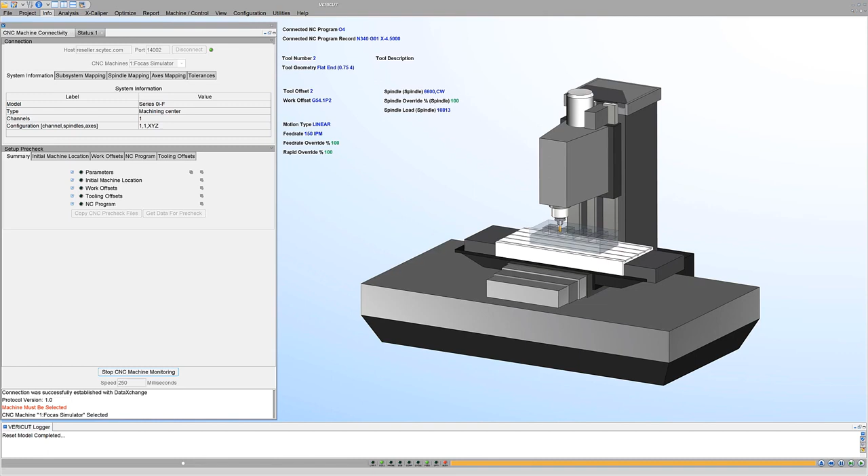CNC Machine Monitoring continually updates the connected Vericut session with the CNC machine's axis positions, active NC program, tool and work offsets, cutting tool in use, and a wealth of information about how the machine is behaving and performing.

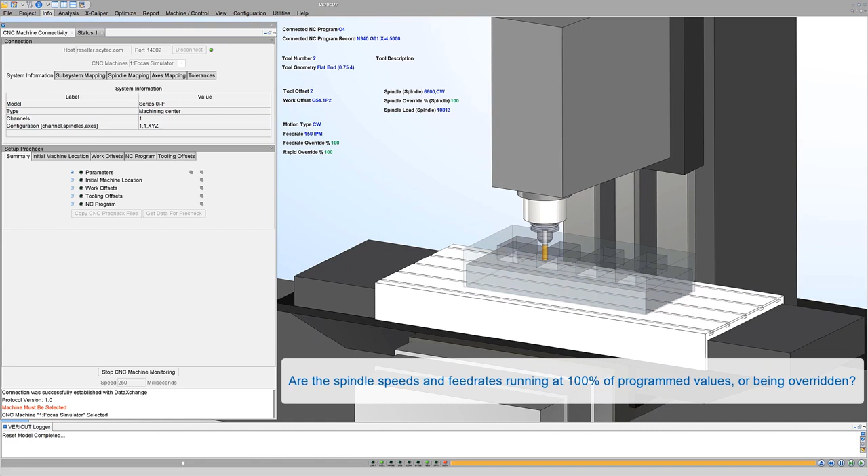CNC Machine Monitoring helps answer questions like: is the machine running or stopped? If stopped, why? Which part, program, or tool is running, and what part of the NC program is being executed? Are the spindle speeds and feed rates running at 100% of programmed values or being overridden? How much longer until my part is finished?

See spindle or feed rate adjustments on the controller immediately displayed in Vericut. Identify overrides or emergency stops as they happen in real time.

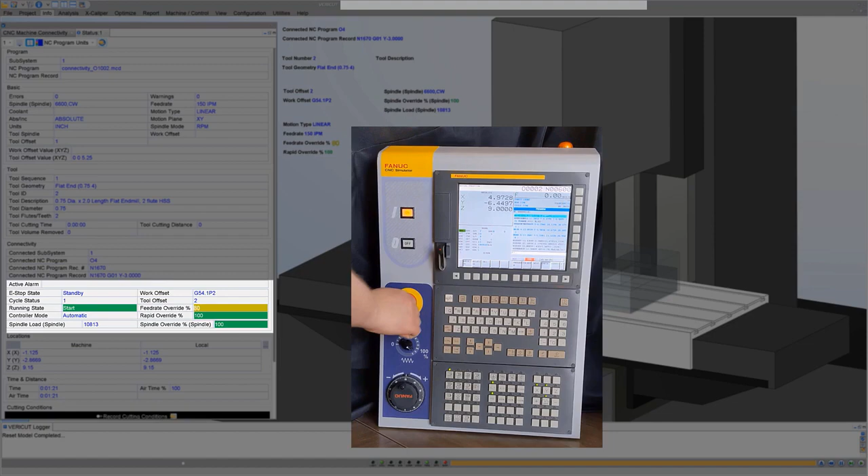CGTech's Vericut works with Scytec's DataXchange software to achieve high-accuracy digital twins of CNC machines on your shop floor.

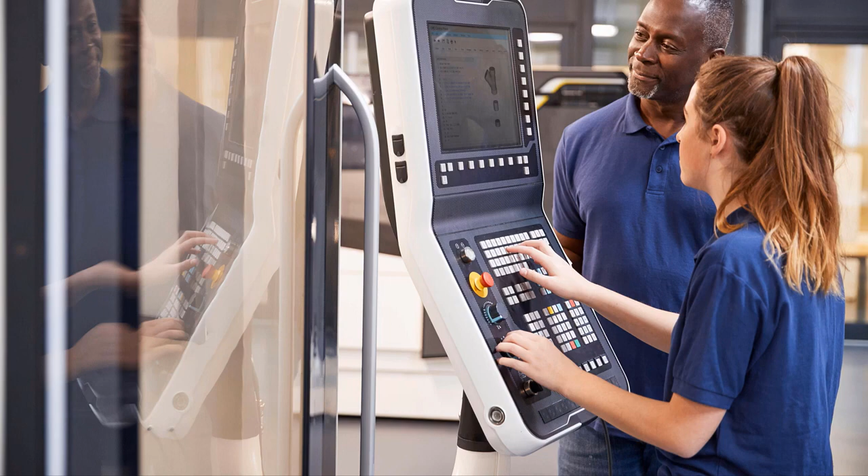As a result of the Scytec-CGTech partnership, Vericut can connect to CNC machines via Scytec's DataXchange Machine Monitoring software. Vericut has expanded on the CNC Machine Connect module to include a standalone CNC Precheck application.

The CNC Precheck application can be used on shop floor computers or Windows tablets next to the CNC machine to compare setup information in the CNC machine to the corresponding settings in your Vericut simulation. By ensuring these settings match as closely as possible, users can avoid unpleasant surprises from occurring in the shop.

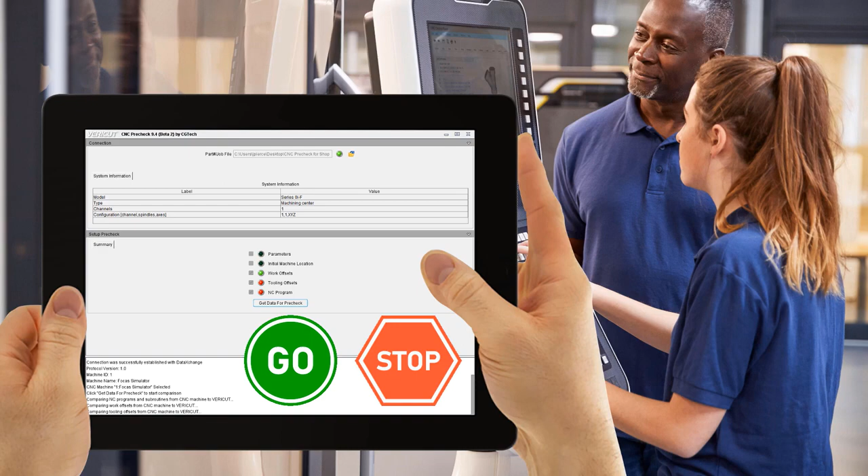Before pressing Cycle Start, use the CNC Precheck app to act as a quick go, no-go gauge to verify the real setup on the machine matches what was simulated in Vericut. For additional information about the Precheck capabilities, see the CNC Machine Connect video.

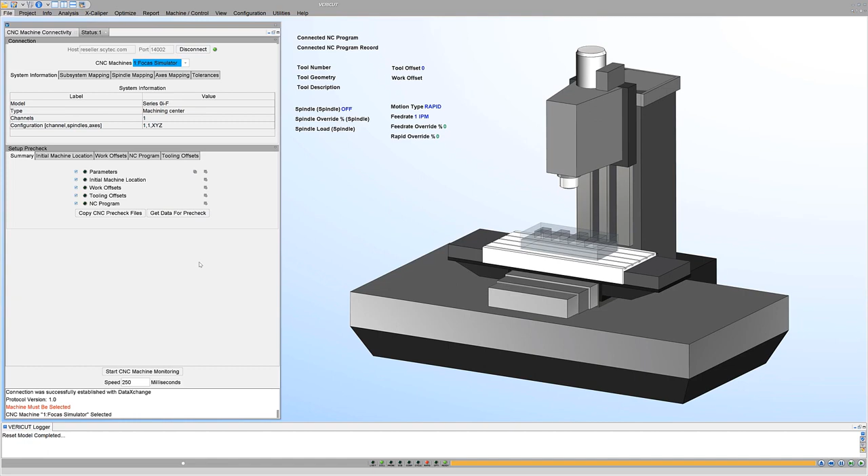As a result of the Scytec-CGTech partnership, Vericut can connect to CNC machines via Scytec's DataXchange software. The CNC Machine Connect module gives users the ability to connect with and utilize the data from CNC machines on the shop floor in your Vericut virtual machine.

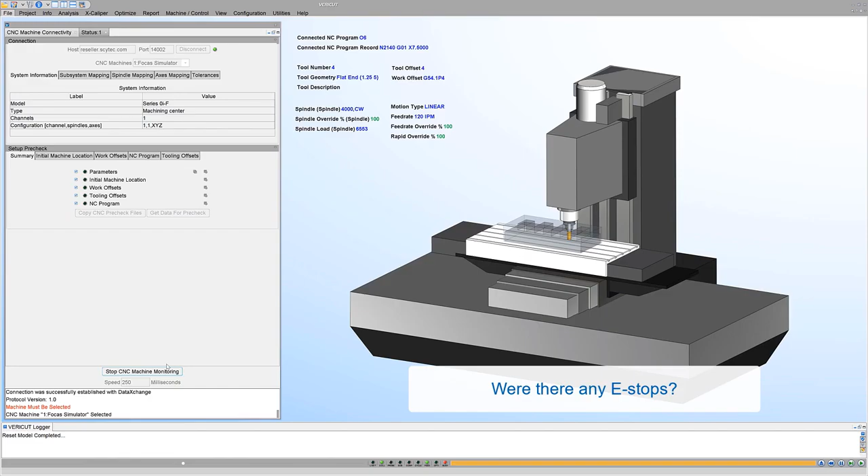Answer questions like: did the shop have the correct NC program and subroutines? Are the cutting tools in the machine set to correct lengths? Did my feed rates and spindle speeds work, or were they modified? Were there any e-stops? Also available is Vericut's standalone CNC Precheck module.

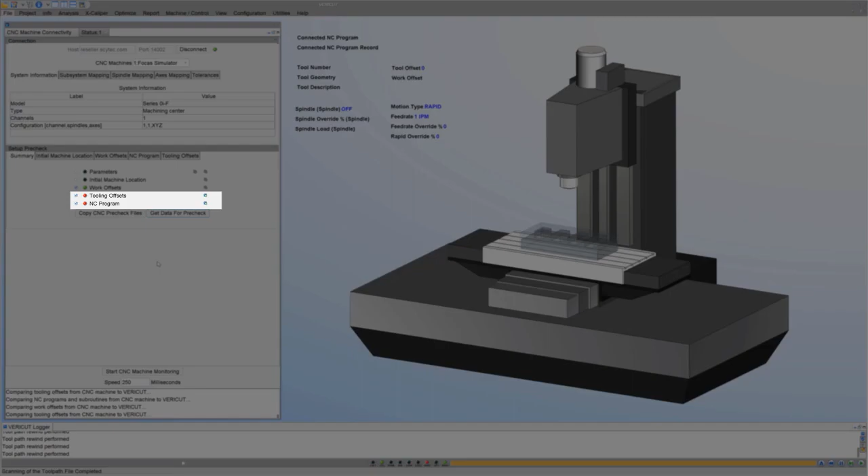This application can be used on shop floor computers or Windows tablets next to the CNC machine to compare important setup information to the corresponding settings in your Vericut simulation. If differences are found using CNC Precheck, the NC programmer can investigate further. Indicator lights clearly highlight when machine data matches Vericut or not.

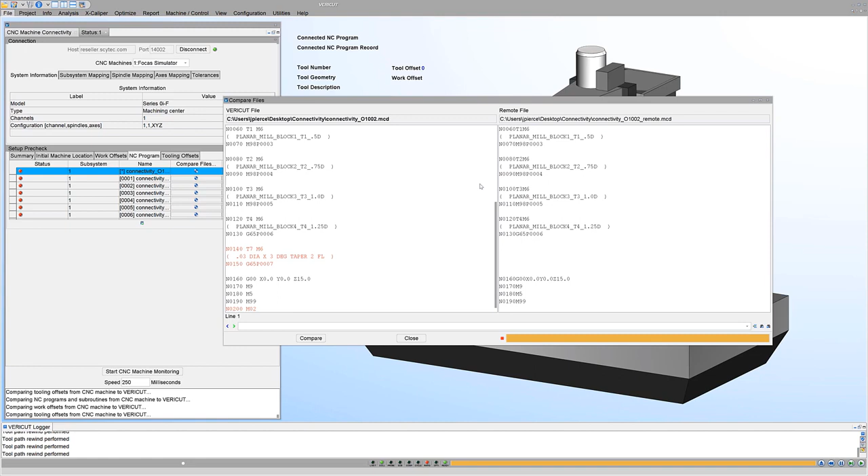Compare the NC program from Vericut to the NC program in the real machine. The comparison shows a revision that is not in the CNC machine. The comparison also shows a missing section of G-code.

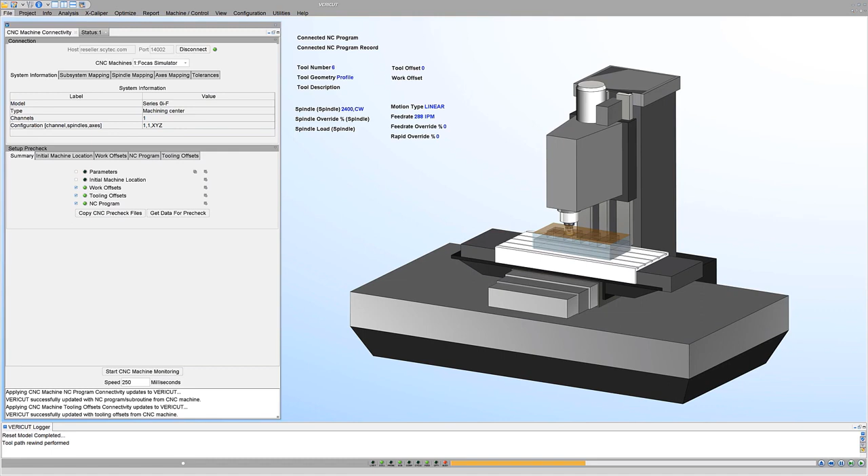Identify tool length differences between Vericut and the tools on the CNC machine. Automatically update the tool lengths in Vericut to match the real machine. The Vericut simulation is run with data from the CNC machine to see if there are any differences. In this case, we see using the real tool lengths from the machine will cause an error.

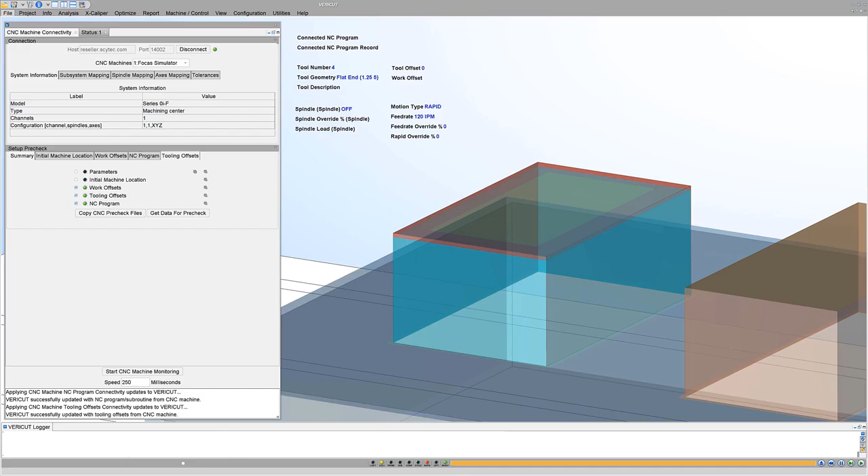CGTech's Vericut works with Scytec's DataXchange software to achieve high-accuracy digital twins of CNC machines on your shop floor.

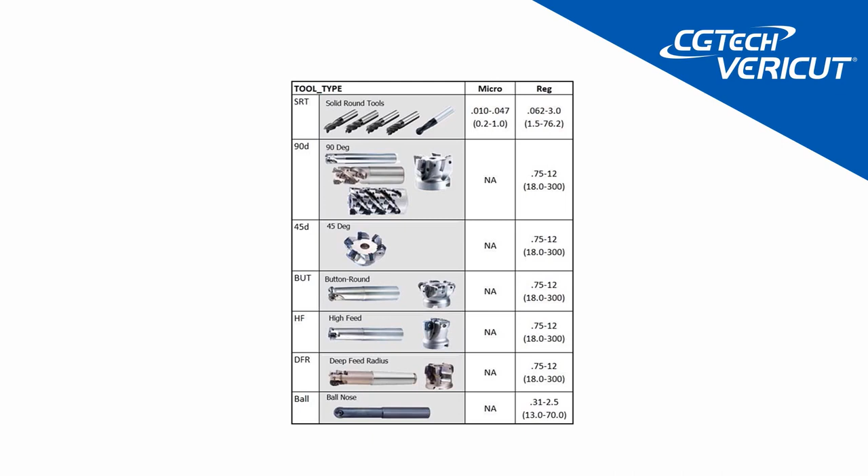In Vericut 9.4, Vericut's tool data containing industry-recommended cutting data such as spindle speeds, feed rates, cutting limits, and more is available to support regular and micro tools that machine a wide range of stock materials.

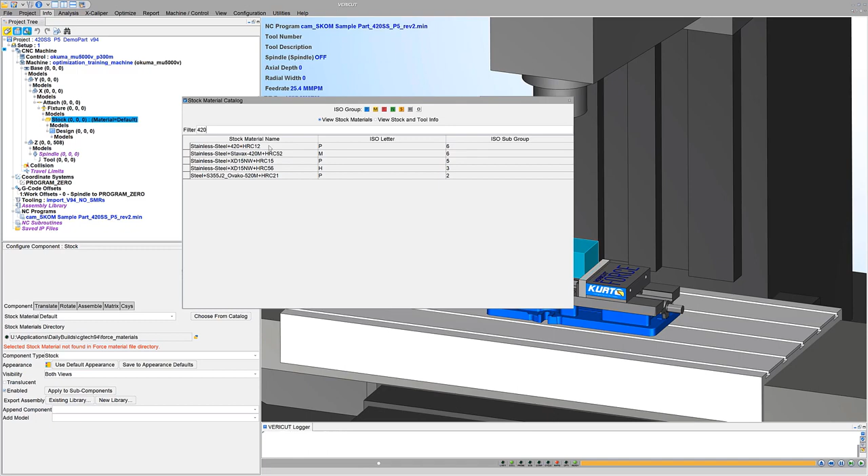Cutting values provided are for the current stock material, so start by selecting the material. In our case, it's 420 stainless steel. For proper feed speed handling, ensure cutters have the correct number of teeth, type of cutter, material, and edge type defined.

With just one click, the Provide Default Tool Data option automatically provides cutting data for all cutters or insert tools capable of using Vericut's stock material records. Let's look at Tool 1, a 25mm solid end mill.

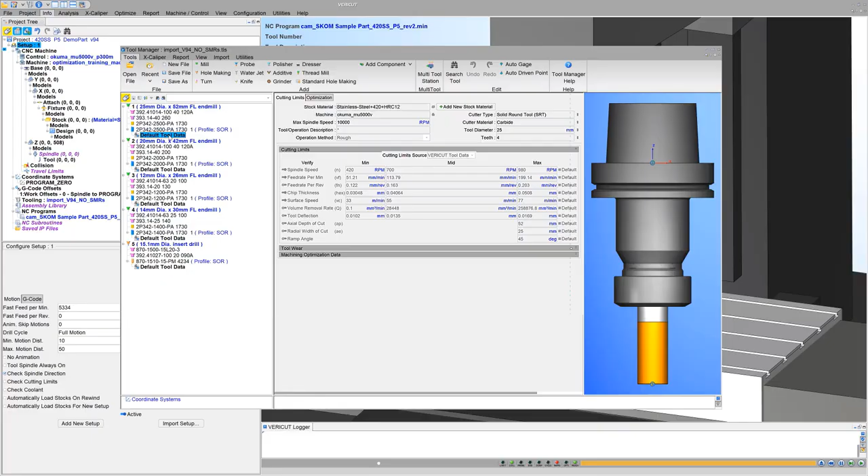Notice the operation method is rough, and cutting limit source indicates these values are from Vericut's tool data. If Vericut tool data isn't available for a cutter stock material combination, then default values are provided. Starting optimization settings are also provided.

Default tool data acts like stock material records used to verify cutting and optimization. However, default data cannot be modified. To customize, for example to choose values for finish operation methods, simply add a stock material record, then modify as desired.

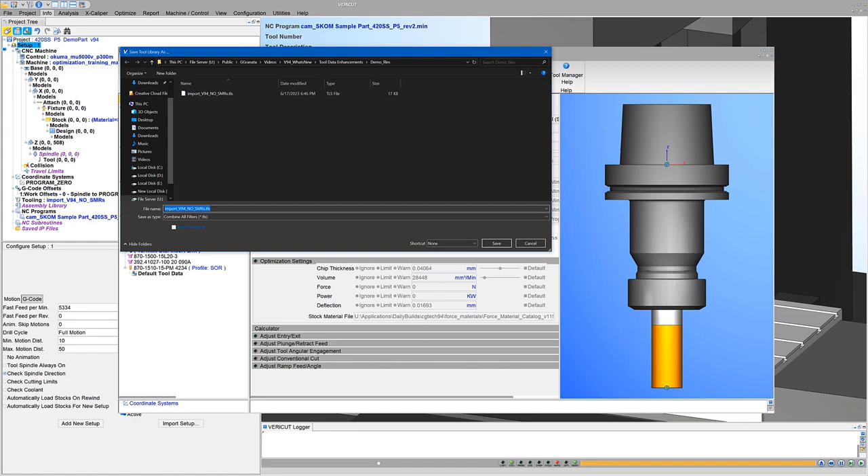But for our case, we'll activate the default data for roughing. With default tool data and Vericut's tool data, you're ready to verify and optimize cutting within recommended range limits. For more information about Vericut tool data and default tool data, see the Vericut help.

In Vericut 9.4, all users benefit from enhancements that streamline optimization. Assuming cutters' inserts are properly defined, with the correct number of teeth or inserts, type of cutter, cutter material, and edge type, optimizing is as easy as 1, 2, 3.

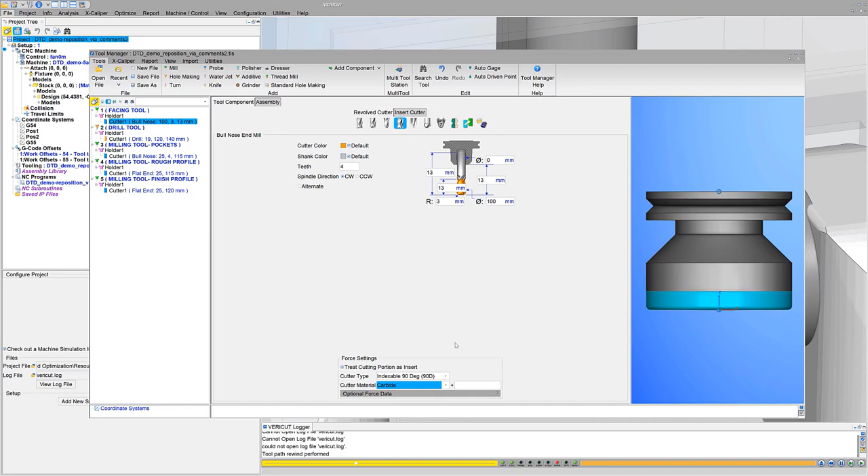Step 1. Choose a stock material from Vericut's stock material catalog. Choosing a material from the catalog also provides access to Vericut's tool data. You'll hear more about that in a minute.

If your tools were imported with vendor-supplied cutting data, such as from CoroPlus Tool Library, MachiningCloud, TDM, and other popular tooling sources, they may already have stock material records and be ready to optimize. But if not, Step 2.

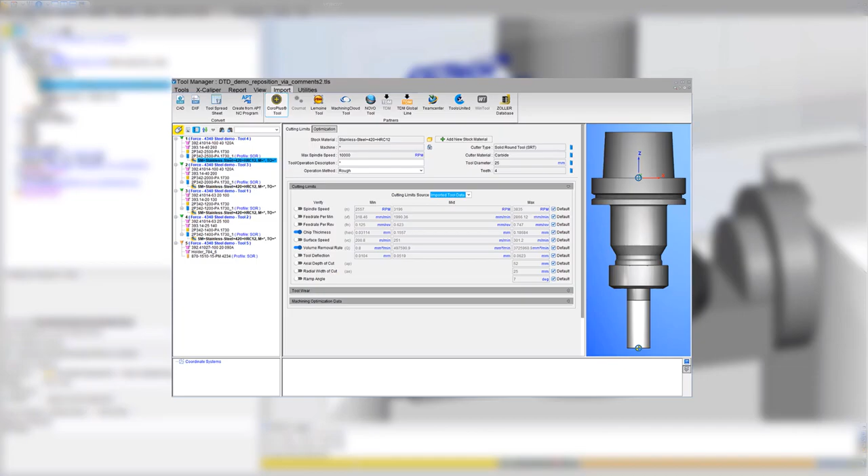Choose the Provide Default Tool Data option. Vericut automatically provides cutting data for all cutters and insert tools known to be used in the current stock material. The cutting limit source indicates when default values are from Vericut's tool data.

By default, Vericut tool data is provided for rough operation methods. Vericut tool data is also available for finish operation methods by adding a new stock material record, then modifying as desired.

If Vericut tool data isn't available for a particular cutter stock material combination, then default values are provided and optimization is limited to reducing time for air cuts only. Colored icons that look like these let you know you are ready for Step 3, Optimize.

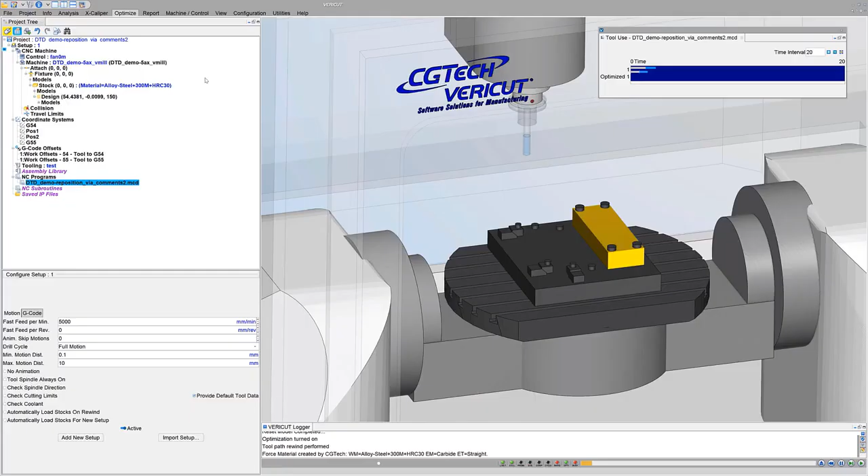In 3 easy steps, we just optimized a roughing NC program using conservative feeds and speeds and realized some great savings.

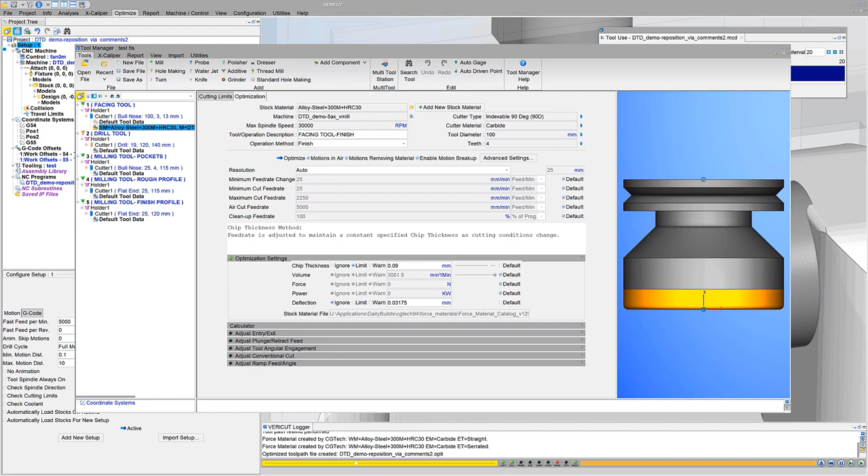Customizing stock material records is also easier, thanks to Streamlined Optimize options and optimization limits that can be used in any combination. For more information about optimizing in Vericut, see the Vericut help.

As a result of the ToolsUnited CGTech partnership, Vericut users can directly read 3D tool assemblies and cutting data from Tools United and use them in Vericut.

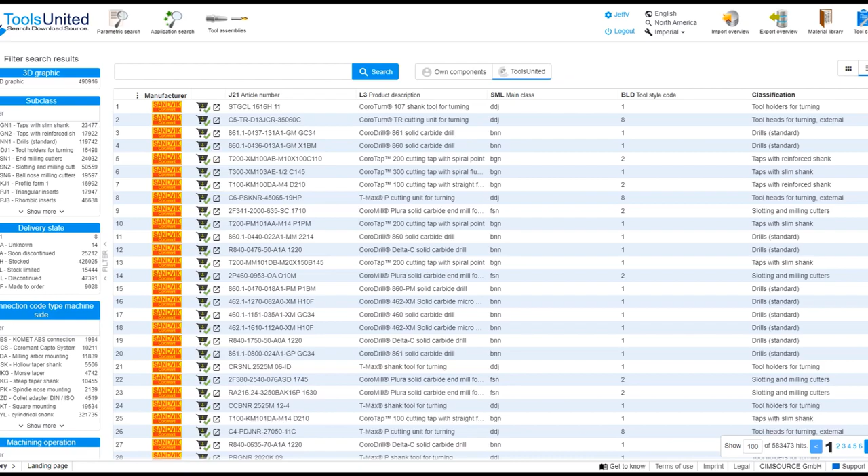The Tools United to Vericut interface provides access to over 40 tooling vendors that contribute to the Tools United application. A complete set of 3D cutting tool assemblies are quickly and easily transferred from Tools United to Vericut. Along with Vericut's other tooling interfaces, creating your virtual tool library has never been easier.

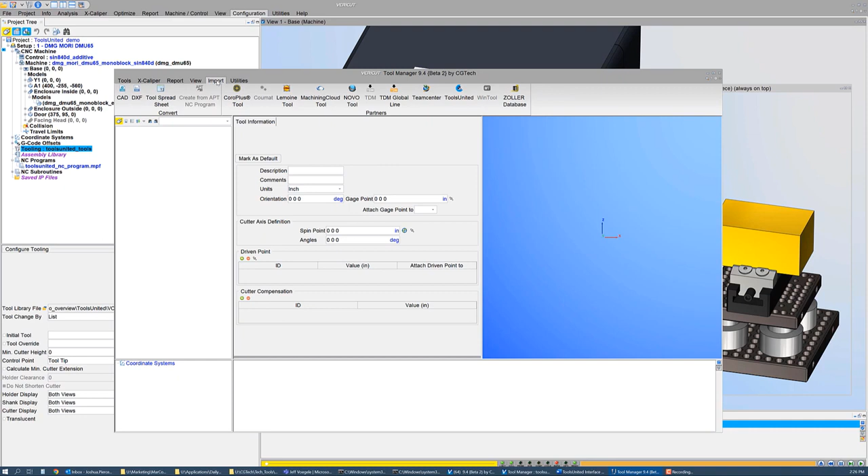To utilize tools from Tools United, open Vericut's Tool Manager. Then, from the Import ribbon, launch the Tools United interface. Select the tool data previously output from Tools United. The tools and their cutting data are read into Vericut's Tool Manager.

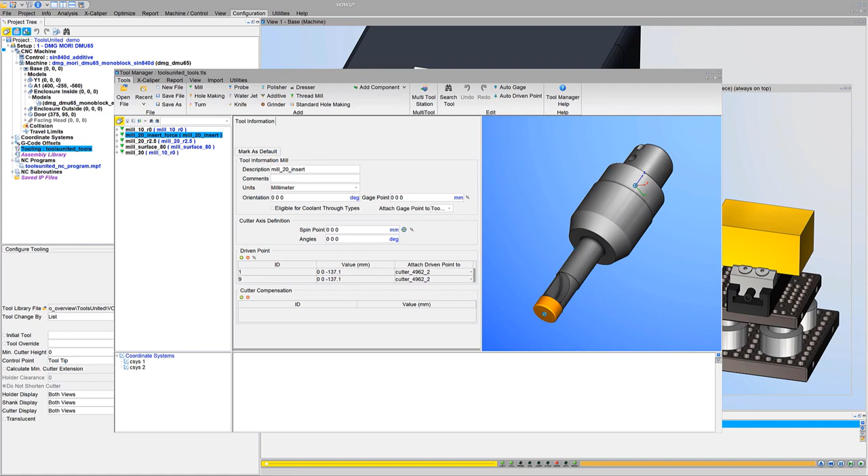As we look at each of the tools in Tool Manager, we see the same geometry and detail as seen in Tools United. Now we run the simulation. You are now simulating your job in Vericut using accurate 3D geometry of tool assemblies from the Tools United application.

Tool Manager in Vericut 9.4 includes a Tool Performance Database, TPD, that suggests starting spindle speed and feed rate values to use with cutters in a wide range of stock materials. This data works with Machining Optimization data, MOD, in Vericut's Tool Manager. MOD displays a table of spindle speeds and feed rates that helps programmers achieve desired cutting conditions.

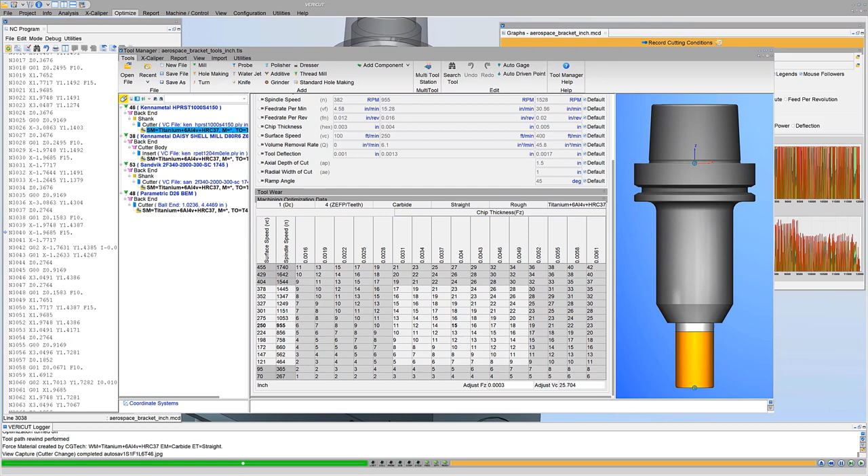For more information on the Tool Performance Database and Machining Optimization data, see the Vericut Help.